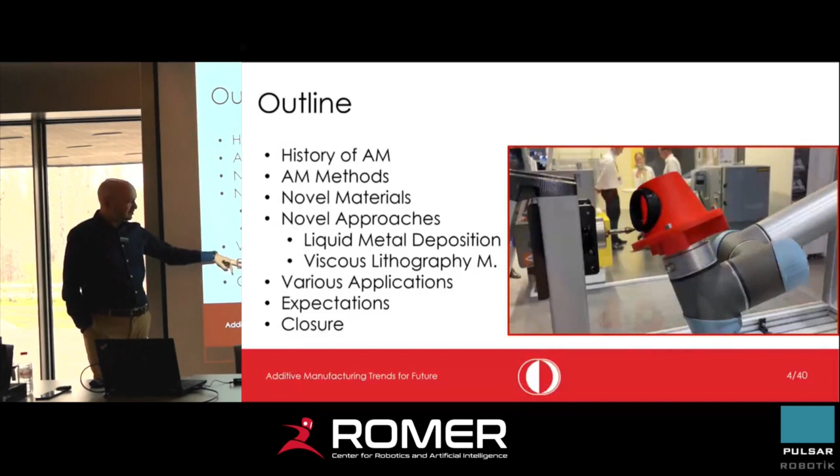Then I will show you various interesting applications of additive manufacturing, since additive manufacturing is not just a manufacturing method; you also need to change how you design the products. If you cannot design the parts properly, you will not be able to take advantage of additive manufacturing. So I will show you some interesting examples, then talk about what we are expecting in the near future, again show you some pictures and videos, and lastly I will conclude my presentation.

And this is the video I recently took in November. So you see they are using robots again, and robotic additive manufacturing is another field. Maybe that is highly related to, obviously, ROMER, this center. And you can see we have a little extruder here, and the robot is just responsible for the rest of the motion. And the extruder, as you see, is not moving. It's just stationary. And at the back side, we have a feeder. It's just feeding material, but the rest is done with this robot.

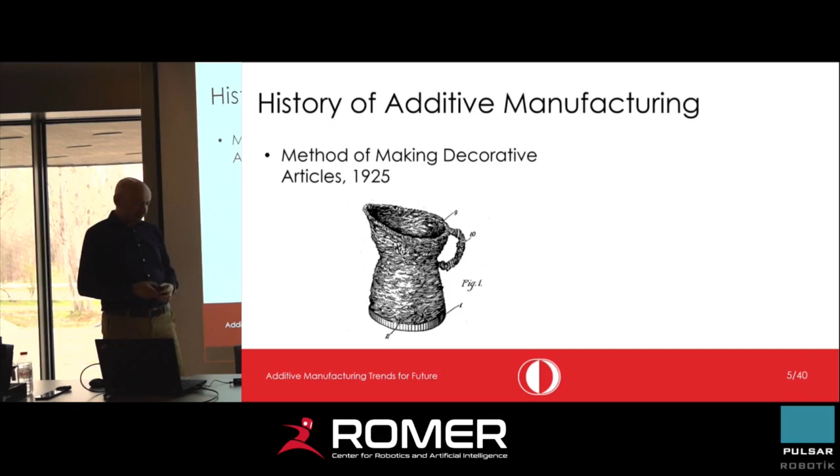So how did things actually start? This is a very old patent, as you see. It was filed around 1925 by, as far as I remember, Ralph Baker. And he thought that he could make use of the welding process to manufacture some products. This was his idea. So you see the title is Method of Making Decorative Articles. So this was a very old idea, but recently we are using robots again to manufacture some complicated products with welding. So it was actually the start of maybe some additive manufacturing methods.

But recently, maybe a month ago, I realized that things actually go back maybe 4,000 or 5,000 years. People were doing some kind of additive manufacturing, but obviously they didn't know that it was additive manufacturing. In order to manufacture jars and cup-like shapes, they were preparing coils and putting them on top of each other. So they were adding material on top of each other. And then later, by doing some rotation, they did some forming on it to manufacture the final jar.

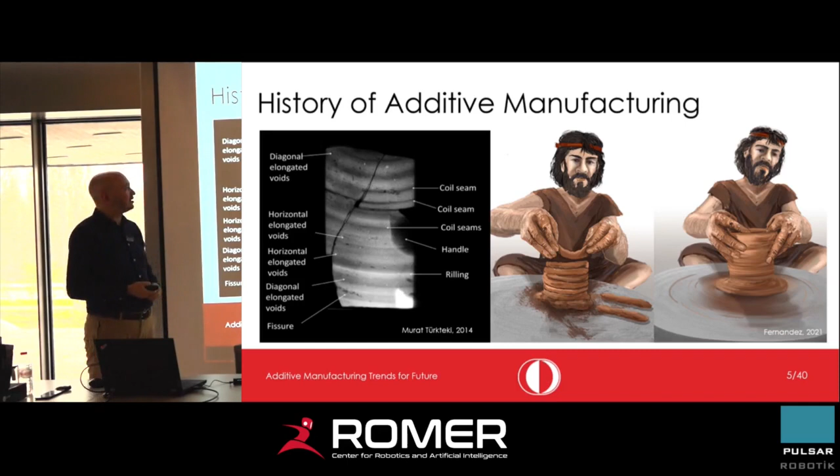And then, about 10 years ago, Murat Türkteki found some artifacts around Eskişehir in Küllüova, and they did some X-ray analysis, and you can see the layers. The same coils these people were making about 5,000 years ago. You can see the coils, the layers, and obviously they're not perfect, but they don't need to be perfect since they were used for storing things. So as I mentioned briefly, although things started in the 19th or 20th century, in reality it started about 5,000 years ago.

If you standardize these methods, there are several additive manufacturing methods, but now ISO and ASTM have agreed that there are 7 basic types. So if you come up with a novel additive manufacturing technology, it will probably fit into one of these. Whether it is an extrusion method, whether you are using a resin material and then polymerizing it, or whether you are jetting the main material. I will talk about these, by the way, and show you some pictures. In some of them, we make use of powders, and in some, we jet binders instead of the main material. In the last two, we mostly use laser or arc energy sources to melt materials and manufacture complicated shapes.

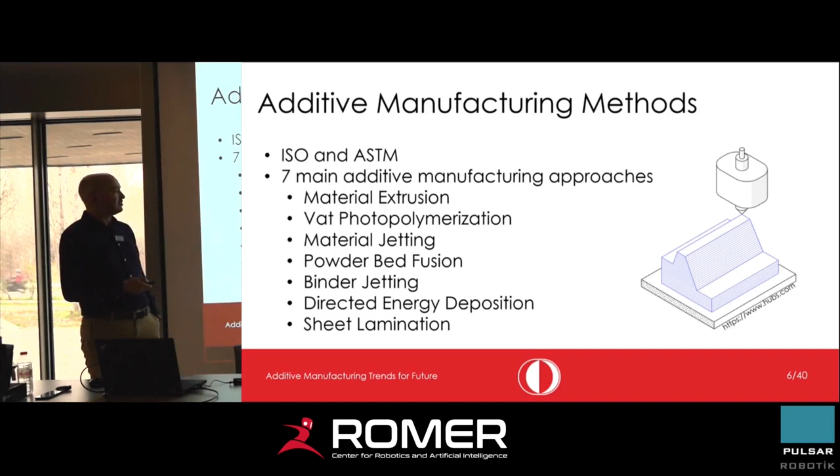And lastly, sheet lamination; we don't have much technology underneath this one. It's not that mature yet, but we will probably have more companies, more technology, more systems in the upcoming years. So, as I said, I will briefly talk about all these technologies so that everyone knows what I'm talking about.

This is the first one, and maybe most of you have experienced this material extrusion method. We make use of filaments, and then we have a feeder. This is not shown here, but filaments are fed into this extruder, and since the temperature is high at the tip of the nozzle, we extrude material. Since the head is moving on the XY axis, we can deposit material along these paths and come up with 2D layers. And if you repeat these layers many times, you will obtain such complicated shapes.

And another thing is that if you have complicated shapes, you may need to use some support structures. I have, for instance, some examples here. There's a little bunny, and as you see, it has ears which are hanging. So we need to support the ears underneath. Otherwise, while printing, since this is done layer by layer, they will fall on the ground. And in order to keep them in place, we make use of support structures as shown here.

And this is, by the way, the most common type of additive manufacturing method. It's the cheapest one, and we can make use of several materials. And another thing is that we can employ this method for various approaches. We can even use concrete to print some simple structures or buildings, or we can make use of some cells and try to come up with bioprinters, or we can even use chocolate.

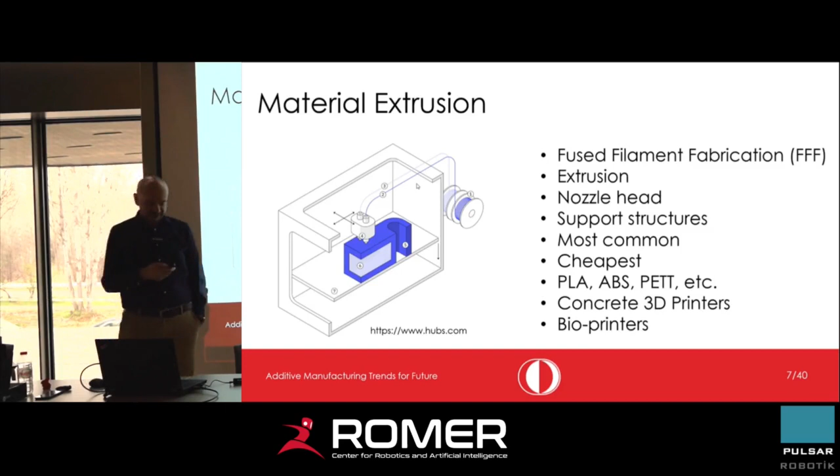And the second one, this was actually the first type of additive manufacturing invented. It is stereolithography, but we have some variations of this one. It uses photopolymers, a liquid type of material actually, and sometimes we call them resins. If you want to turn these photopolymers from liquid to solid, then you need to polymerize them.

And to polymerize them, we need to use light sources. Here we are using a laser, but it doesn't need to be a laser. You can even use some UV light or different light sources. The thing is that the energy level at this point should be higher than the critical energy level. And then photopolymerization will start, and our resin material will now be solid.

And I have another example here. This is, by the way, the same model. And you see that again, we have used lots of support structures, since the product is manufactured inside a liquid tank, but the liquid itself obviously will not be able to support these overhanging regions. So we need to have solid support structures.

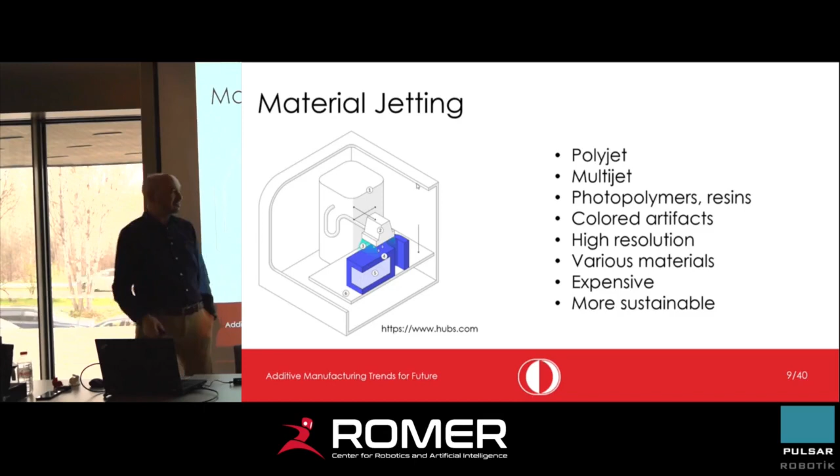Again, the rest is the same. Our head needs to move on the X and Y axes. And after one layer is completed, we need to lower our table. And again, it has high quality, like in the case of SLA. Another thing is that this is quite expensive, maybe due to the patents they have. But since they're not using a tank, they don't need to start with a high amount of material. So we can say that it's more sustainable.

Although you are printing the same design, same model, in polymers you don't need support underneath. Even if you have overhanging regions, that's not a problem. But for metals, there are several regions where we need to have support structures. First of all, it gets heavier. Another reason, the temperatures are very high. So with the help of these extra structures, we transfer heat and try to decrease the temperature difference between the layers so that the quality of the part is improved.

And in both of them, after the parts are produced, we can recycle the powders. But the thing is that the surface quality is usually not good. Another important issue with polymers: you can manufacture assemblies as they are. You don't need to manufacture them one by one. You can put the whole complete assembly into the software of your printer, and then the whole assembly will be printed as it is. After they are produced, you don't need to do the assembly.

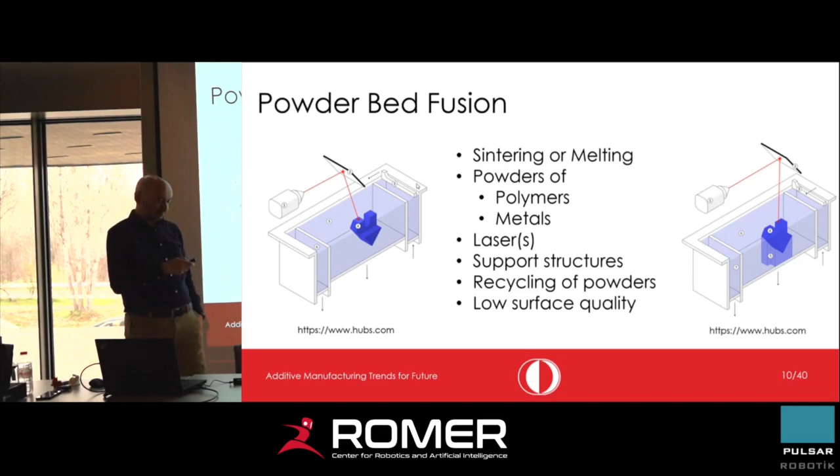But the problem is that once you take this product out of the printer, it is not strong. We call it a green part. Maybe you can even break it with your hands. So we need to perform different types of secondary operations. For metals, we prefer to do infiltration so that the gaps are filled with different metals and the strength is improved. But for ceramics or other types of things, that may not be a problem. Just sintering may be fine.

Another thing about this process is that we are not limited in materials. We can make use of plastics, metals, ceramics. For instance, in the metallurgical department, Eda Hoca is working on metals using binder jetting technology. And last week, I visited a company in Izmir, and they were using this technology to manufacture ceramics. They were depositing ceramic powders, and then with proper binders, they were joining the powders together and having ceramic parts printed.

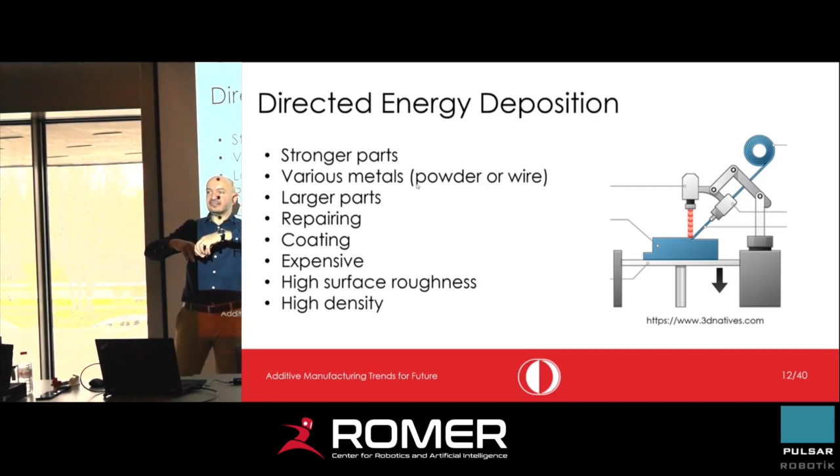Another technology is directed energy deposition, and this is especially good for metals, and we obtain quite strong products. As the name implies, we have an energy source, and we need to direct that energy source to the tip of our nozzle. At the same time, we are depositing material, and with the help of the energy source, we are melting that, mostly metal. It might be in powder form or wire form. If it's wire, we may use simple lasers, or sometimes arcs, like in the welding process. And for powders, we mostly use lasers.

Usually we need to have a protective environment around this deposition so that there will be no oxidation and no other issues with melting. If you do not have a protective environment around your melt pool, then you will probably have several defects, porosities, in the final product.

This method can further be used for repair purposes. Assume that you have a very large product, and you have a robot. Maybe at the tip of the robot, you have a laser and a powder depositing unit. You may bring your robot beside the product and fill some gaps, some cracks, so that the overall cost compared to manufacturing a new product will be reduced. Or you can use this process for coating operations. But again, it's quite expensive. We make use of lasers, and materials are specialized.

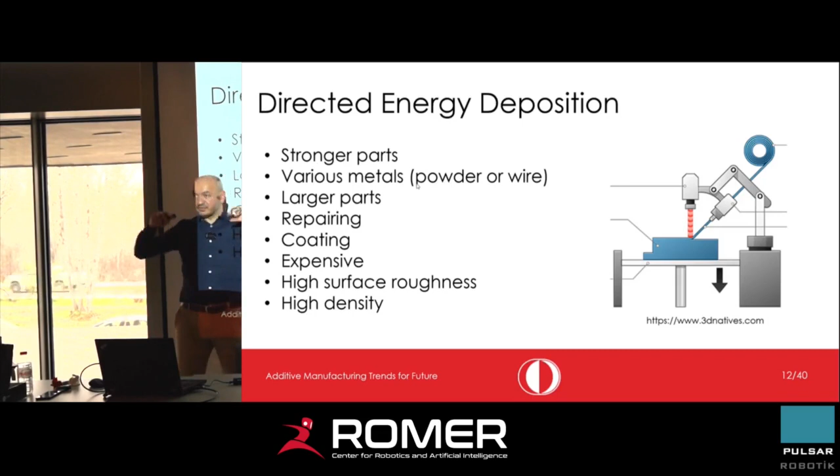Another thing, this has quite high surface roughness since controlling the melt pool is not easy. Also, we are depositing material using powder, so the quality is not good. But the advantage is that the product you're obtaining usually has high density, since you are depositing more material, and sometimes you make use of high speeds for that, so that increases the density of the products.

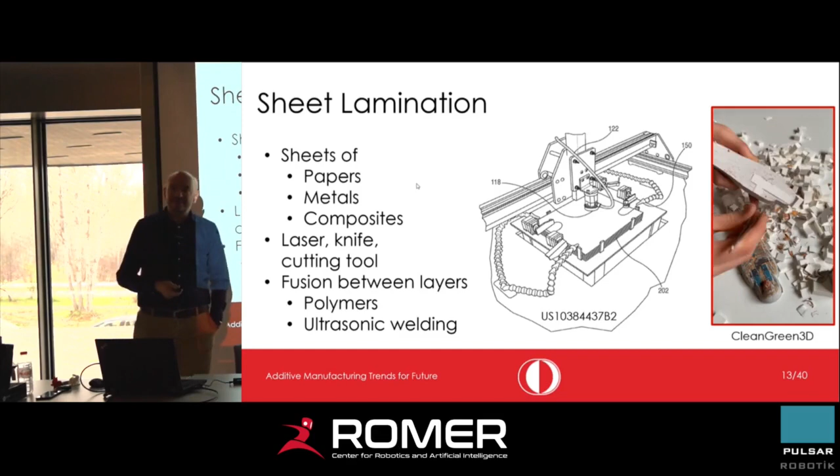And the last type of method is sheet lamination. As I said, this is the least mature type of additive manufacturing. We are still working on that, and maybe people didn't find any application areas. We can make use of sheets of paper, metals, and composites. So what we do, we put them on top of each other, and then with the help of a knife, as you see in one of the patents here, it doesn't have to be a knife, but it needs to be a kind of a cutting tool or a laser, you go over the outline of the layers and then print the products.

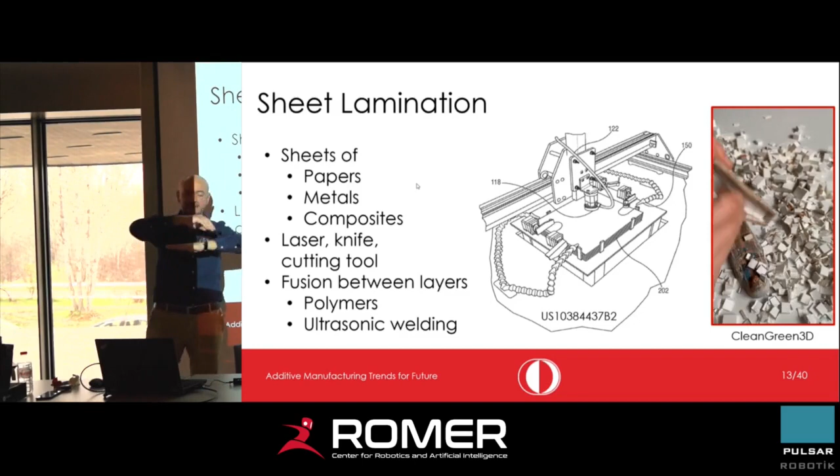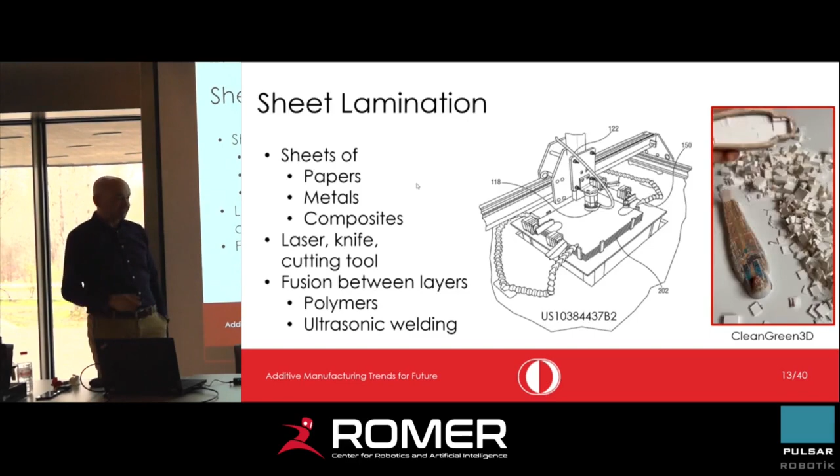And another issue in this process is that since we are putting layers on top of each other, we need to have a proper connection between the layers, and that can be obtained by making use of some adhesives, or if you are making use of metals, then you may go with ultrasonic welding. It's a totally different topic, but this is maybe one of the interesting research areas these days. So now I hope that you understand the types of additive manufacturing technologies. There are 7 of them.

And now I will talk about what kind of contributions have been made recently in terms of materials and in terms of technologies. So if we briefly talk about materials, if you consider conventional manufacturing operations, we don't have any limitation. We can machine wood, plastics, metal, so there is no limitation. But in additive manufacturing, we have low numbers of materials available for plastics, for metals, so we are limited. And that's why we cannot easily manufacture what we have in mind, or we cannot have counterparts of each artifact. That's why these days material scientists are always trying to come up with different materials for additive manufacturing.

And these materials might be in the form of powders, filaments, and resin. You have seen the technologies. Some of them were using powders, some were using filaments, wires, and some were using resin materials. So if you come up with some novel materials in one of these forms, then you can maybe use them on the available technologies.

And another interesting thing is that most of the new materials are coming with resin materials, since probably its research is more comfortable; we can put new additives inside this resin material and come up with different materials. So if you come up with new materials, then probably you can come up with novel applications. In most of the projects, we are limited by the material. But if someone invents a new material, then we may think of using that material in different areas and come up with some useful applications.

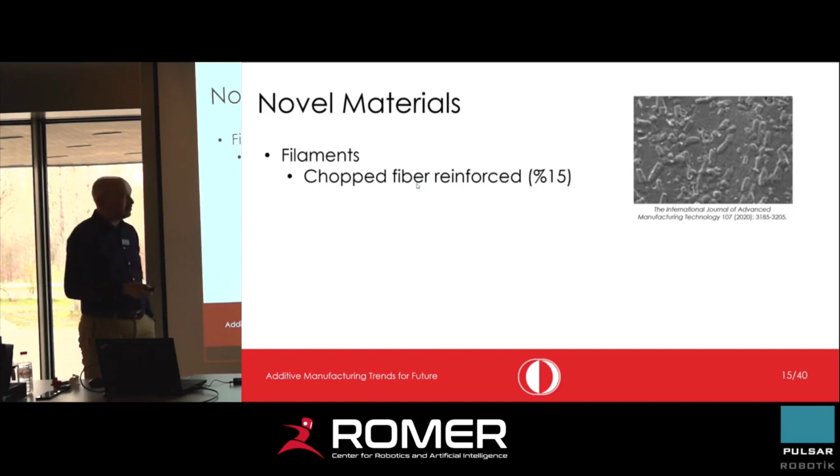Now I will show you some examples of recent contributions. For a few years, maybe about 5 years, we are these days using chopped carbon fibers. We put little fibers inside plastic filaments, and here you see an example picture. About 15% of the volume is filled with chopped carbon fibers. And the thing here is that if you increase this percentage, then probably the printers will not be able to extrude that filament. And that's why they are limited around 15%.

Another thing we are using in terms of fibers these days is continuous fibers. ROMER has recently purchased a printer which uses continuous fibers. So that is very useful. We can even obtain some products having strength values close to at least some simple metals.

And another interesting topic is that we are these days putting some metals into filaments. Filaments are obviously made of plastics, but in order to increase their strength, what we do, this is a cross section of a filament. You can see that metal powders are embedded inside this filament. And even though it has metal inside, we can use the same machine, the same printer again, and print some metal products.

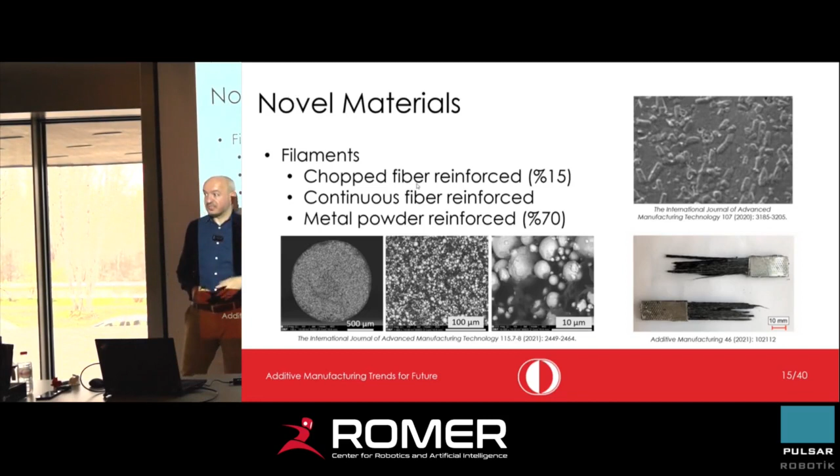But the thing is that your printed metal part will have some plastics. As you see, about 70% of the part contains metal powders, but 30% is made of plastics. So after you make use of these filaments, you need to do a debinding operation so that you remove the plastics, and then you do a sintering operation. You kind of melt the product so that these powders are fused together and you have a proper connection between the powders. So it is doable, but not easy.

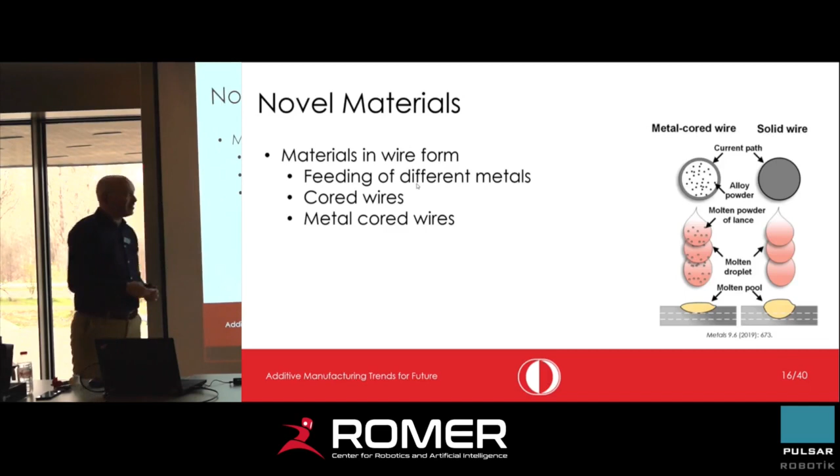We have also some recent improvements in terms of wires, and we can try to use different materials at the same time. Or we can have some cored wires, or even we can put metals inside but plastics outside. So these are some combinations of approaches.

But the thing is that obviously your extruder, your system, should be able to extrude these novel materials. And we don't have any commercial applications of this approach. Probably they haven't optimized some of the settings, or they haven't come up with a proper 3D printer which can handle these difficult materials.

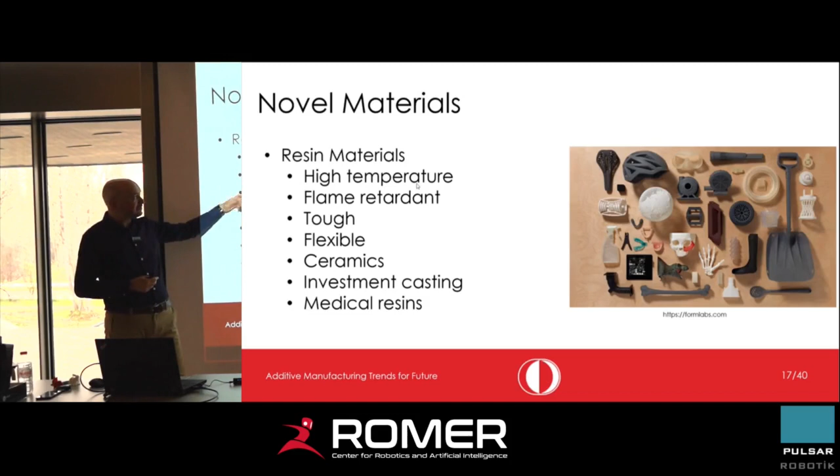And in terms of resin, there are many companies working on different types of materials. As I said at the beginning, it's much easier to come up with novel materials here, since into resin you may put some ceramic powders, or you may change the chemistry and try to make it flexible, or make it tough, or make it flame retardant. So there are different types of resins we can easily obtain.

And in terms of polymer powders, I have a nice example here. Recently, several companies gathered together and worked on a project. The idea was to manufacture a basketball without using any air inside. That's why they call it an airless basketball. And you can see how they have manufactured it. It has the same dimensions and same weight as the conventional basketball, and they used flexible material.

I have, for instance, a flexible material here. You see, it acts like a ball. And they have done a great job, but printing is not enough, since you need to clean all the powders remaining inside, and then later you need to apply some surface treatment so that it feels like a basketball.

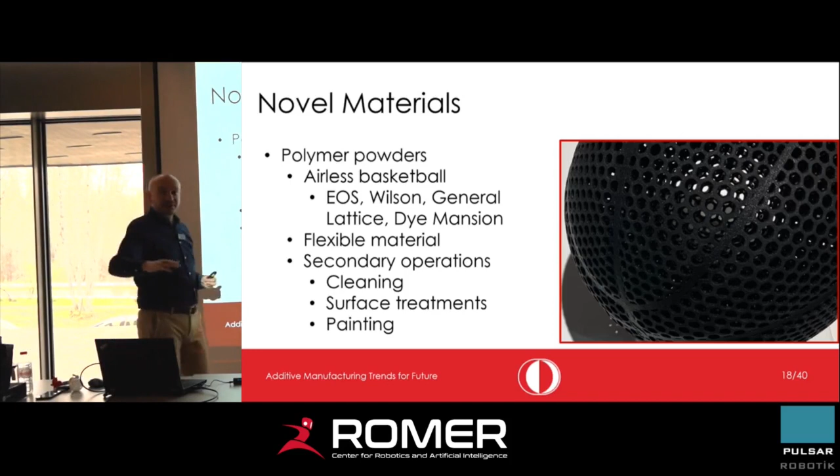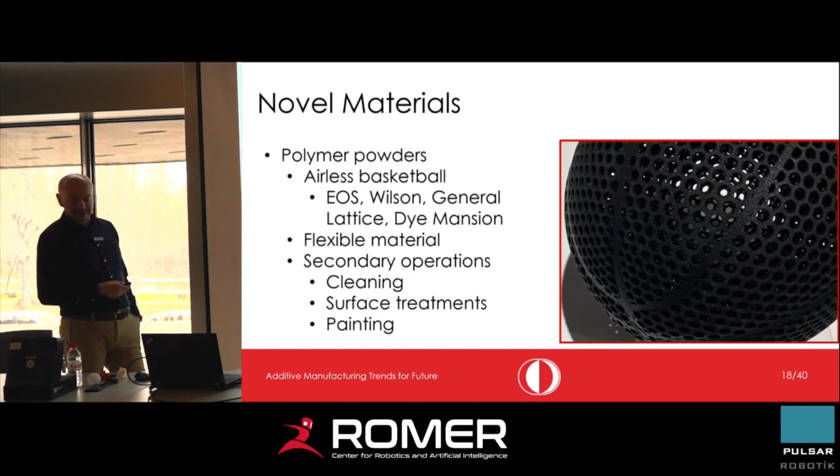If you feel it, this is made of plastics, but I don't feel that it is plastic. It's a basketball. They have done several secondary operations and tried to come up with the real feeling of a basketball. And later, they simply did some painting. And a few months ago, Wilson started to sell this one.

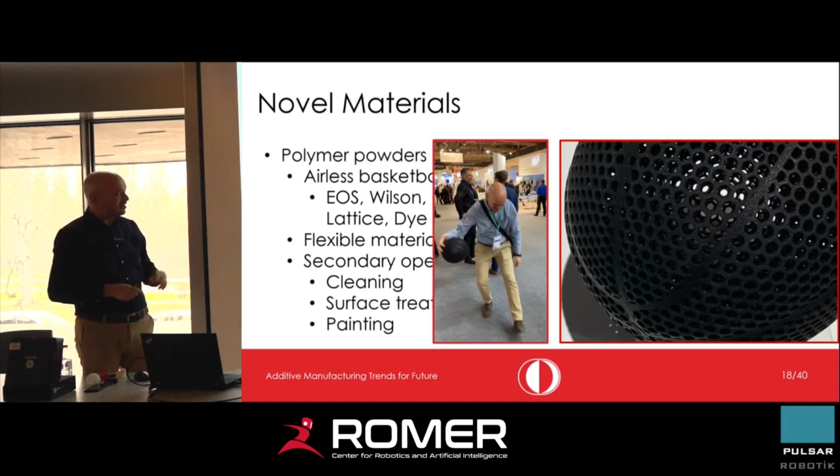And can you guess the price of this basketball made by 3D printers? 2,500. Yes, probably you have seen that. But it was really like a basketball. I actually had a chance to play with this one in November. I also did some shooting, but I haven't recorded that. In my first try it was short, but later when I got accustomed to it, it was actually a basket.

So in my first try it came up short, but in my second try I somehow did it. Professional basketball players will probably not play with this one, since if they get accustomed to it, they will play poorly in the game. I think they have used this one in one of the dunk championships in the NBA, since while dunking you just grab it, that's enough. But for shooting, the dynamics are completely different. So probably they need to work a lot and maybe come up with some different ideas.

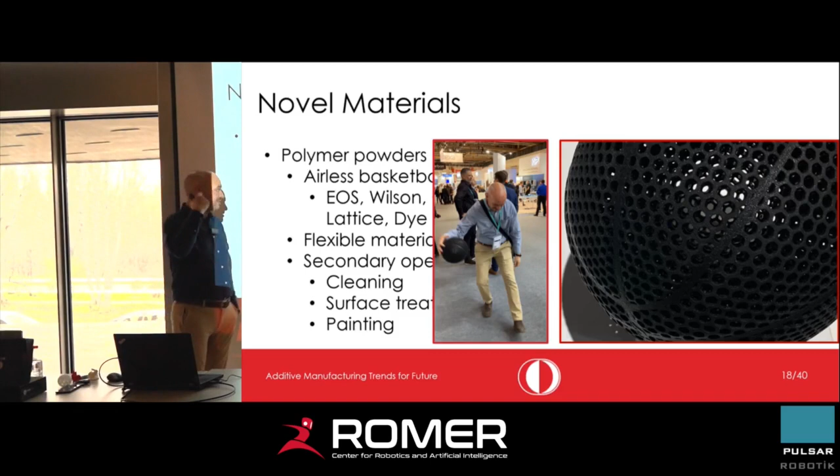And the thing about this ball is that after Wilson launched it, everyone started to print their own basketballs. In different companies, at home, people started to come up with different balls. They haven't tried football, since it's probably not durable, but as far as I remember they also tried baseball and American football.

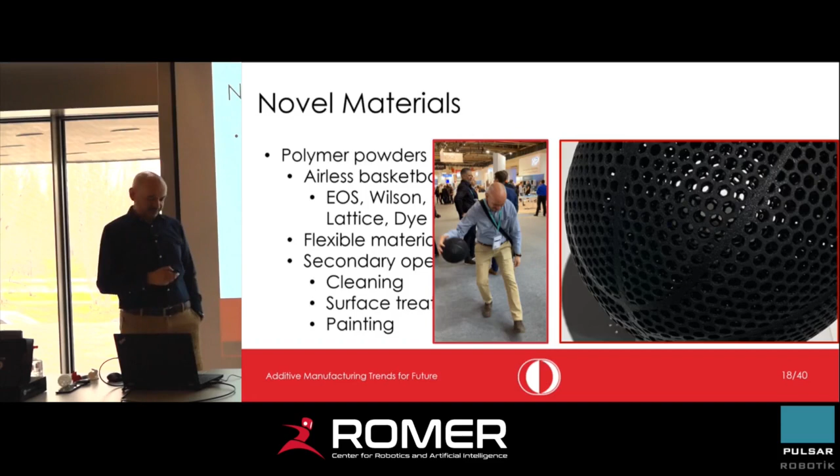I also have some other things about the materials. We were talking about powders. The previous slide was about polymer powders, and for metal powders, these days the trend is to use different metal powders at the same time. In order to do that, your machine should be able to deposit two different powders at the same time. If you remember the sketch of powder bed fusion, we have a kind of spreader, but if you have two different powders, then how is it possible?

But here the question is, do we need this? Do we need to have two materials at the same time inside a part? They have come up with a novel solution, but these days they are trying to find some applications so that they can sell their product. Right now, the only advantage is that if you use copper in some critical sections, you may dissipate heat easily there, but use steel for strength. So if you find such an application, then that might be useful. But for other issues, we can print by using a single metal powder.

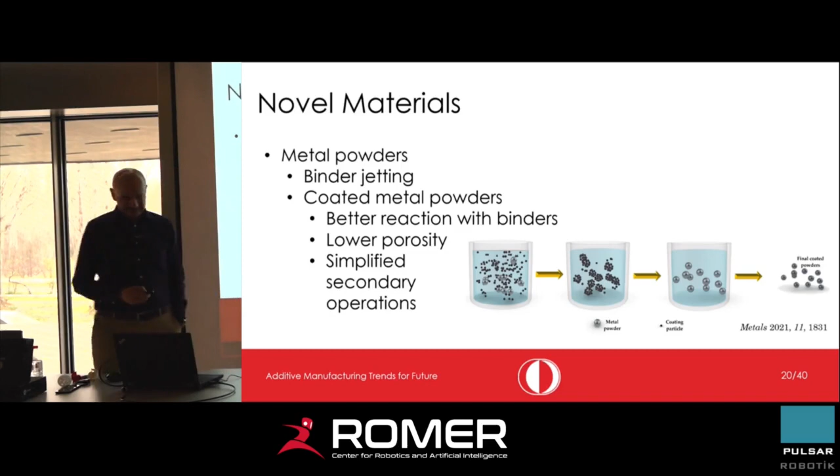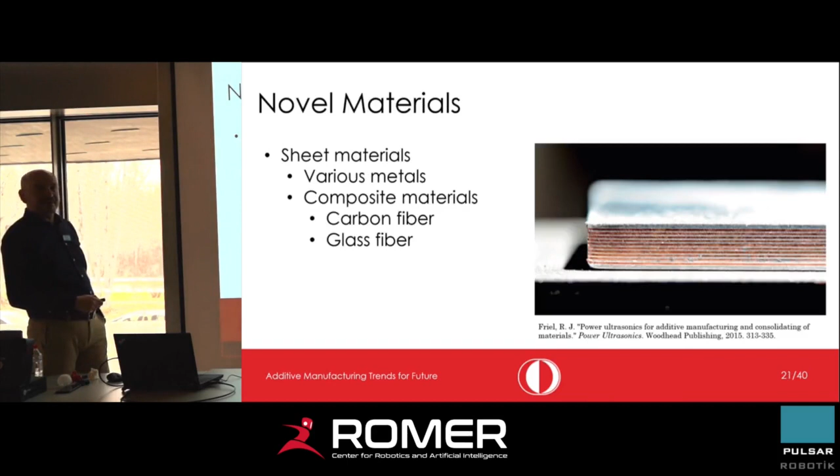So this is all I can say for the materials, but I will talk about what may be more interesting, I guess: what kind of novel approaches we are developing. In order to come up with a novel additive manufacturing technology, a new method, you also need improvements in different technologies, like improvements in projectors, laser technology, computer technology. After you have such maturity in these technologies, then you may think of developing new additive manufacturing approaches. But besides, we also have some ad hoc solutions, little solutions for the existing ones, so that their performance will be increased. And I will show you some examples of the two categories.

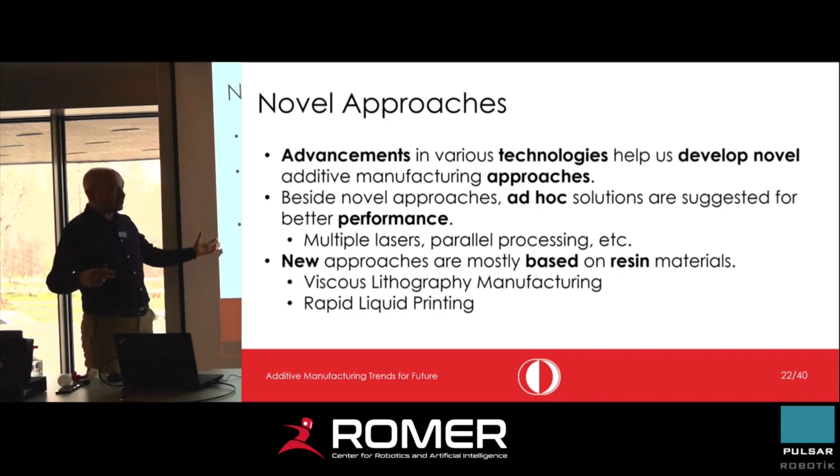And I can say that most of the novel technologies are based on resin material. They are not based on powders or filaments, but mostly on resin material, since it's much easier to process, you don't need to apply high energy. It's in liquid state. So that's why novel methods usually come up over resin material.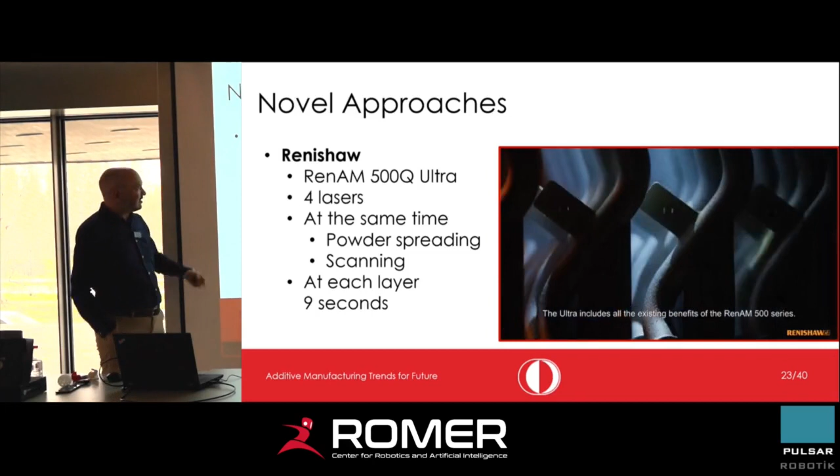Let's start from this one. By the way, this is not a new technology, but an ad hoc type of solution for metal 3D printing systems. I'm not sure whether you have realized what is going on here, but in the conventional approach, what we do is spread powder. Once spreading is done, the laser goes over the table and melts the powders. But what they are doing here is that while spreading powders, the laser is working at the same time. You can see that in a moment. So you see the laser is working, and also it's working at the back side.

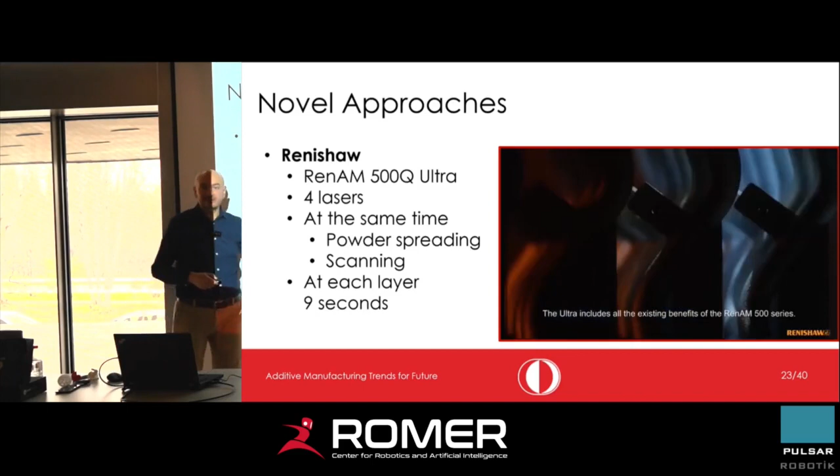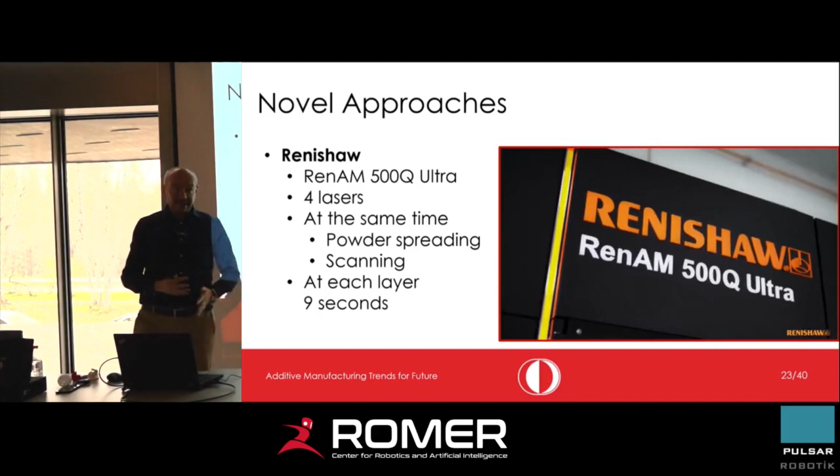Conventionally right now, almost all metal 3D printers wait for the spreading operation. After spreading is finished, they start melting the powders. But they are doing something different so that they gain 9 seconds per layer. So if you are producing a very long product, this makes a lot of difference. And if you think of additive manufacturing being used in critical applications in the upcoming years, then that will be quite important.

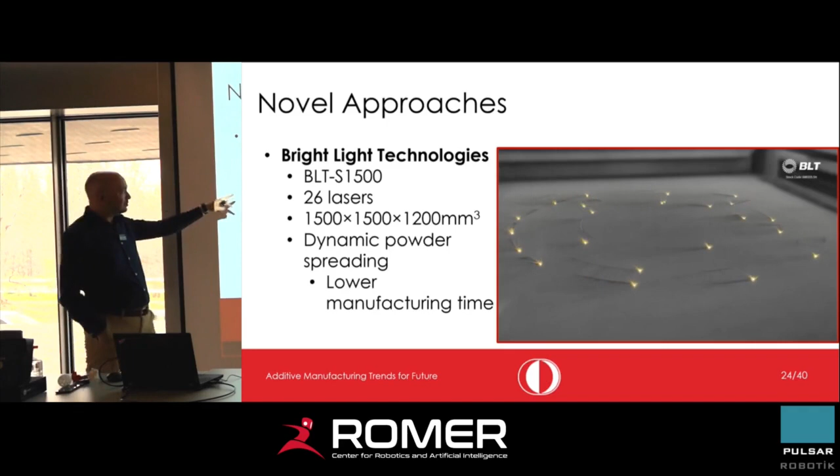And this is another ad hoc type of solution, but this is quite straightforward. What they do is that instead of using a single laser, to decrease fabrication time they use, as you see, a maximum of 26 lasers at the same time. So manufacturing time is decreased a lot.

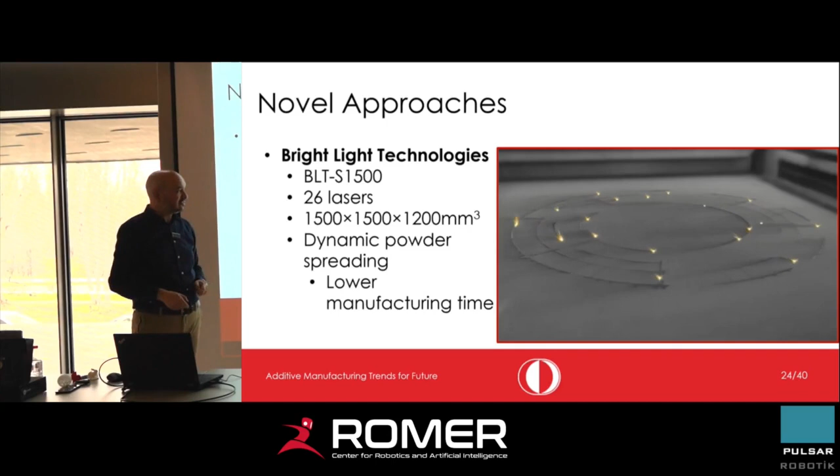But the difficulty is that you need to divide your actual slice into proper regions, and you shouldn't have any collisions, and you shouldn't have too much difference between the regions of two lasers. You need to have smooth transitions between the regions. But obviously, that saves lots of time.

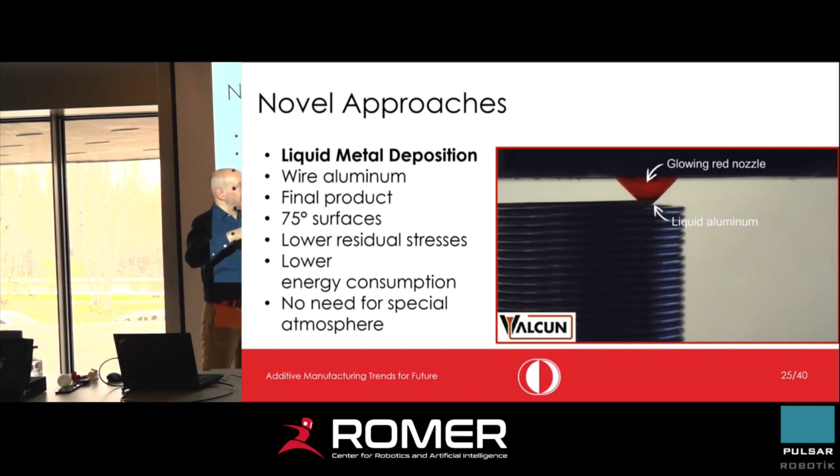And the rest is actually not complicated. It's like material extrusion. We have the nozzle, they are increasing the temperature, melting aluminum, and then depositing it. And since it solidifies quickly, even for a surface having a 75-degree angle, they can manufacture it without using

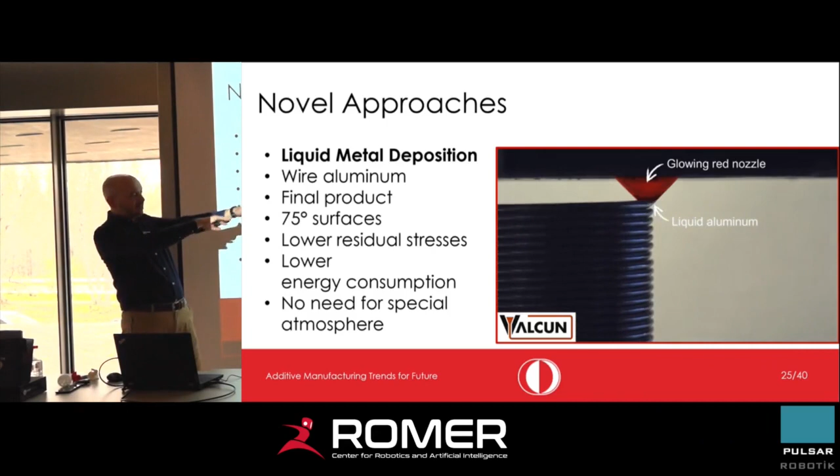any support structures. Another thing, since the temperature difference is not much, again, we have less residual stresses, so the quality is maintained and the dimensions are quite good.

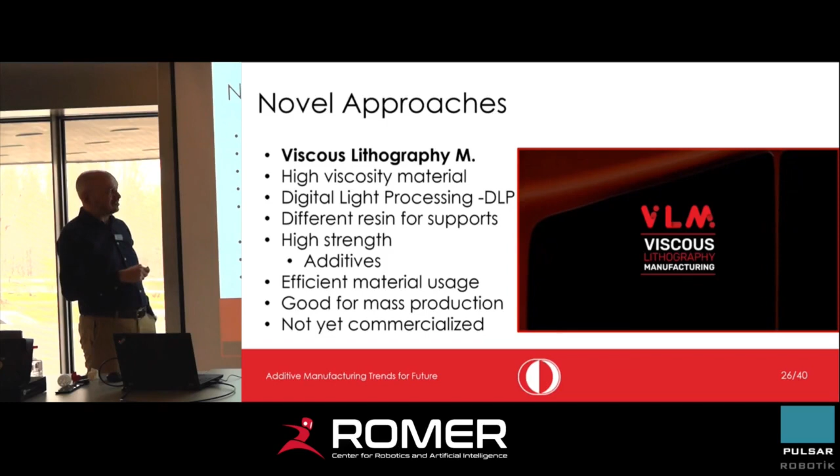And this is another novel technology, and you can see that it is based on resins. But the difference is that they are using highly viscous material. It's quite a special material, and you can see how difficult it is for it to move, but still it's a resin material. And here they actually combine several technologies to come up with a novel technology.

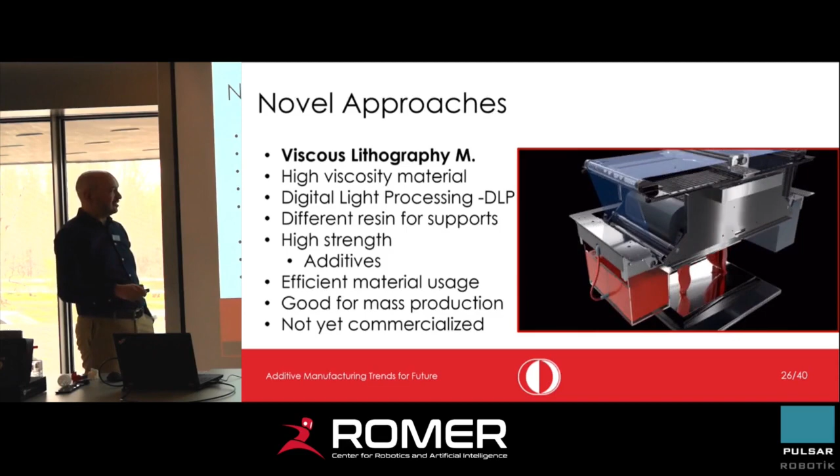You can see that they are using a projector for curing, and these structures are like an extruding process. And another thing, they can use two different materials, one tank for support structure, one tank for main material. And now you see that in a moment, this will take some material and put it onto the film. So it becomes like a sheet lamination.

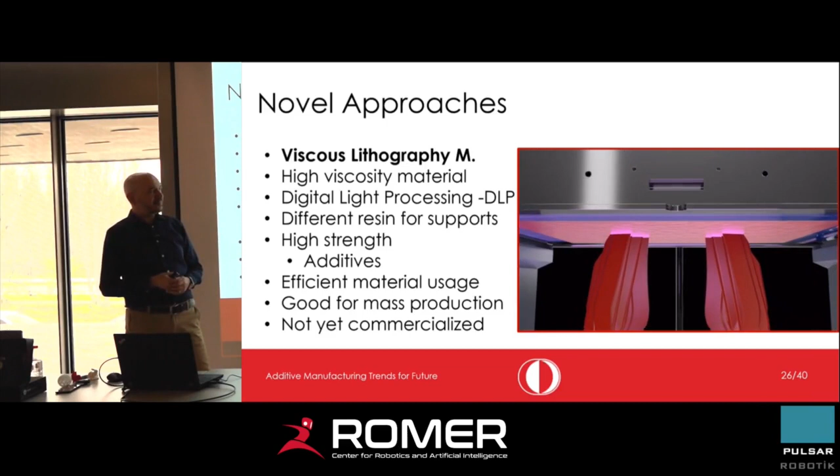But I cannot say that this is purely sheet lamination. It uses some steps of sheet lamination and some steps of stereolithography. And they claim that, with the help of some extra chemicals inside the resin, they manufacture stronger products.

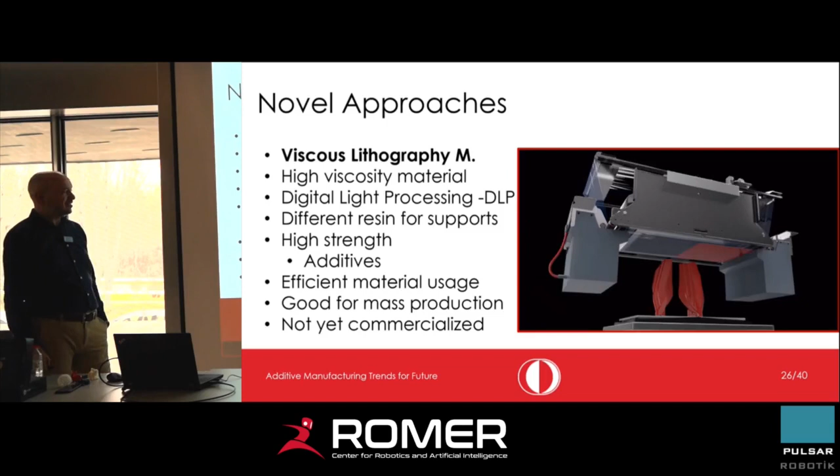Another thing, since they're not using a tank and they recycle unused portions of this film, this is quite sustainable. But the thing is that it's not yet commercialized. Maybe intentionally they're not commercializing it. They're trying to get manufacturing orders from customers and manufacture the parts themselves. But I think maybe in a few years they will start selling their machines.

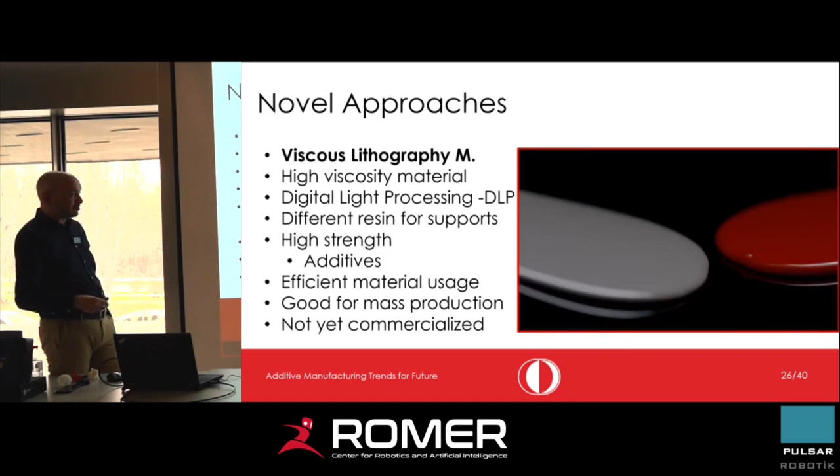And in summary, I can say that this is good for mass production, especially for larger plastics. And you can see their viscosity and two different materials, but they are not mixing.

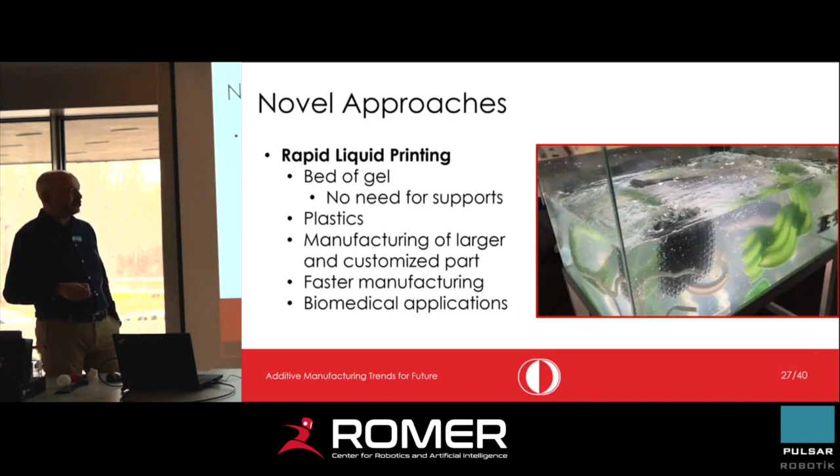What is here is not shown, but they have like an injector. They put the injector inside and then it goes over the bed and deposits plastics. And it doesn't need any support structure. But the thing is that we cannot easily use the outputs of this process. Instead of this process, I can use cheaper material extrusion or stereolithography. Why should I use this one?

So that's why they couldn't commercialize the system yet, but they are trying to find some biomedical applications, maybe flexible, maybe in soft robotics, they can print some simpler shapes which can extend themselves under pressure. So after that point, maybe they will commercialize it.

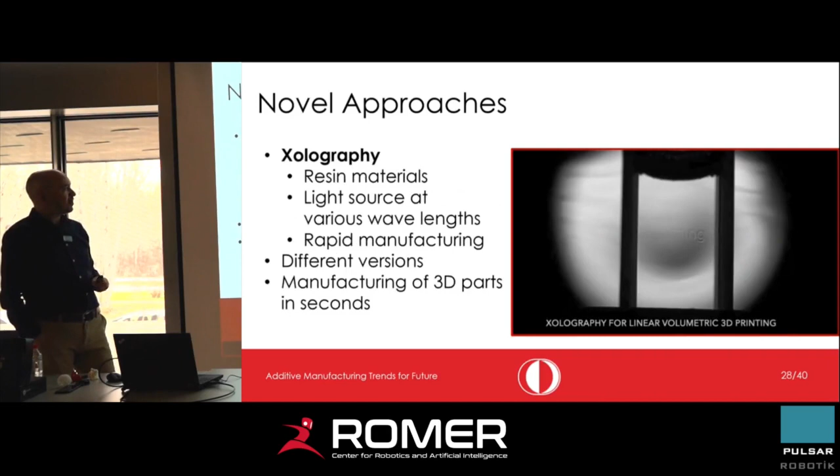Another novel approach, and this is quite different than the previous ones, but still this one is also using resin material. And the idea here is that, for instance, in material extrusion, we extrude some material and go over a specific path. And this is point-based manufacturing.

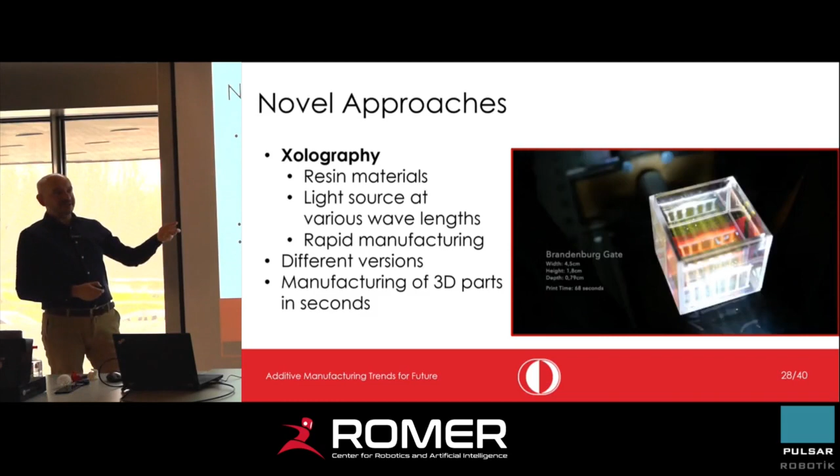And if you think about material jetting, on the head we have several nozzles. And if you move your nozzle like this, then you will be doing one-dimensional printing.

And if you make use of projectors, if you reflect your image and cure the whole layer at a time, then that will be 2D manufacturing, 2D type of curing. But here, they are trying to actually cure the products in a different way, actually by using not completely 3D, but 2D time, maybe plus and linear movements.

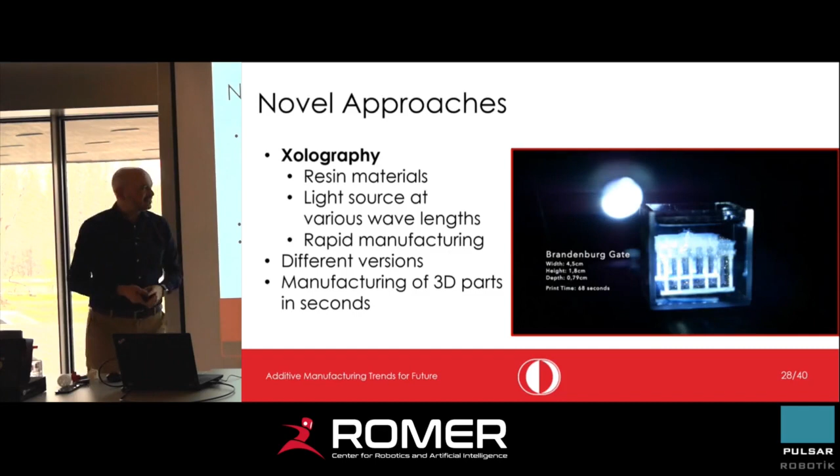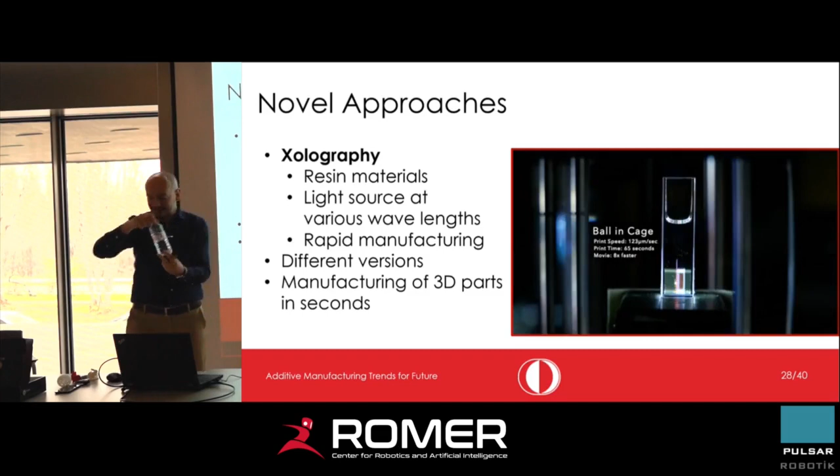But my idea is actually, my dream is to actually manufacture a product in some seconds by using several projectors. So you will have a kind of resin inside this one, let's say, and then you will reflect light from both sides, and in few seconds, your material inside resin will be cured. It's like actually holography. That's why actually they call it Xolography.

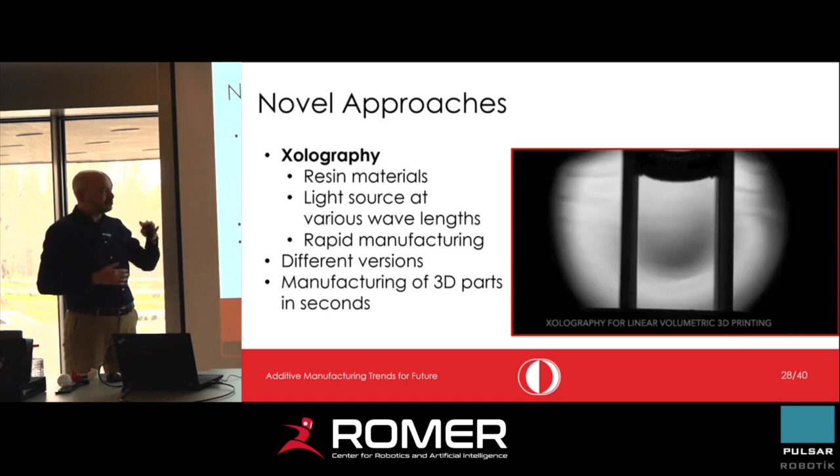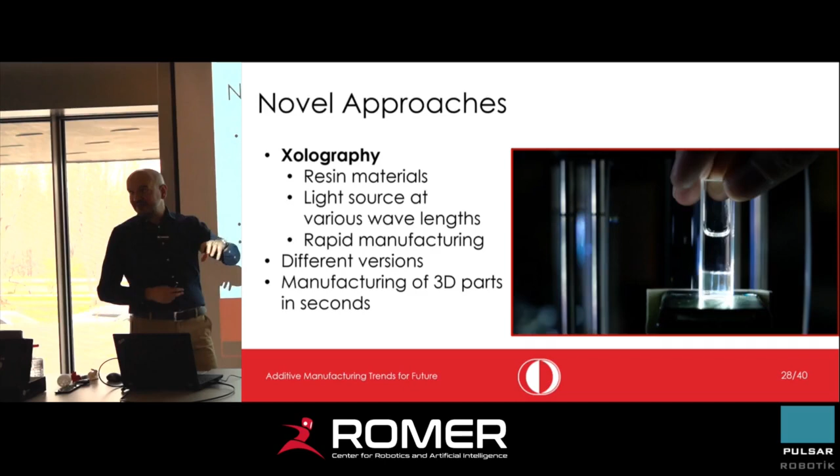I think in near future you will see such an example, since as far as I know, there are several universities working on that. They should actually come up with a proper resin material. Since if you are reflecting light from different sides, then your material should be able to cure itself under these conditions. And the advantage is that, as you see here, it takes about 65 seconds. But in my idea, if you have the proper material, if you have the proper equipment, hardware, then maybe in few seconds, you will be able to manufacture the complete product.

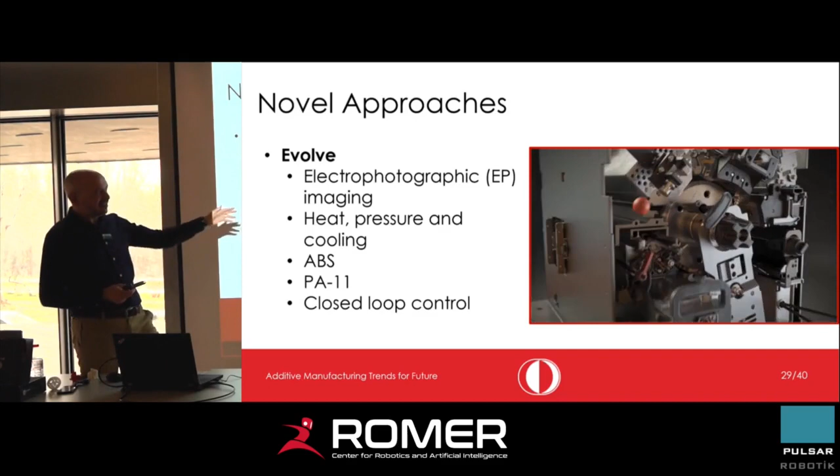Another technology, recent technologies actually Evolve. So even though they have put some video on their website, it's not clear yet how their method is working. And another thing is that they are again not selling the machine. They are getting orders from the customers and manufacturing the products for the customers. You can see, for instance, an example here. It is made of ABS material. They can only use few materials right now.

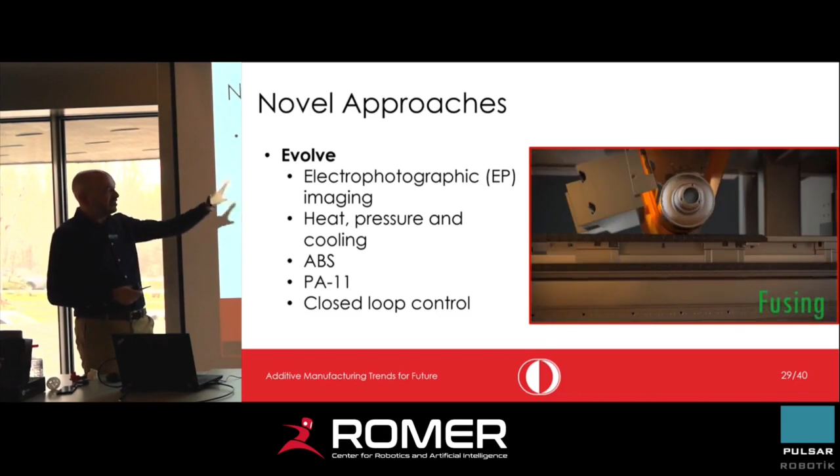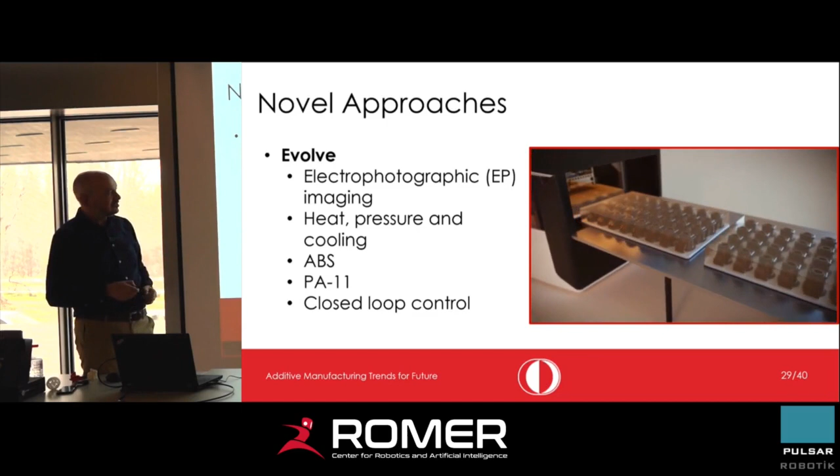They use again some light technology, some resin technology inside, but even though they are trying to describe these methods in this video, it is not clear. They have some patent issues, and that's why they're not giving much information. They are not selling their machine. And obviously they have closed loop control systems at every part, so that they obtain high quality products at high numbers. So that technology is quite useful for mass production.

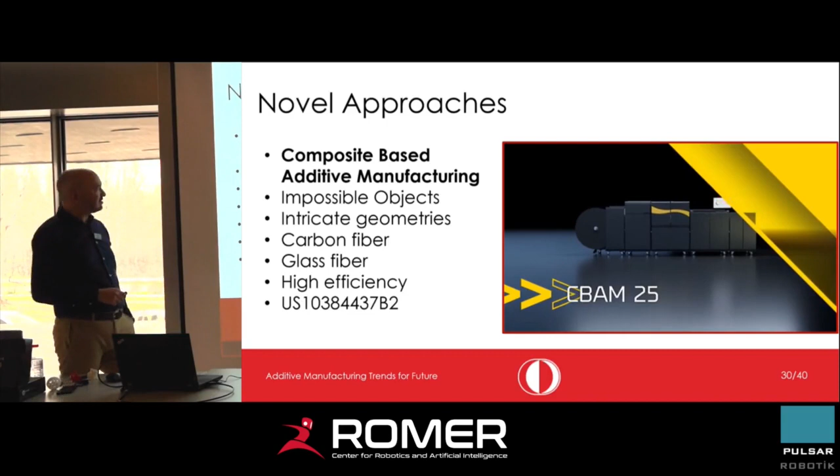Another novel technology is the composite-based additive manufacturing. They have got some investments from different companies, so probably we will be seeing a lot of these in near future. And they start with some composite sheets, and then they deposit some extra chemicals on the sheets, and then cut these sheets and put them on top of each other to obtain complicated composite materials.

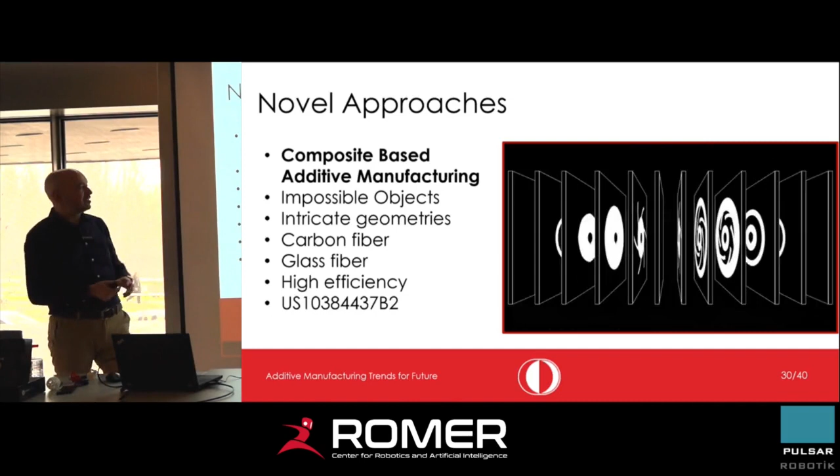Since if you are into the composite world, you know that they are mostly simple shapes. They are sheet-like materials or some simpler geometries. But here you can see that they will come up with a complicated product. Another thing, they can put not only carbon fiber, but they can also put some glass fiber inside.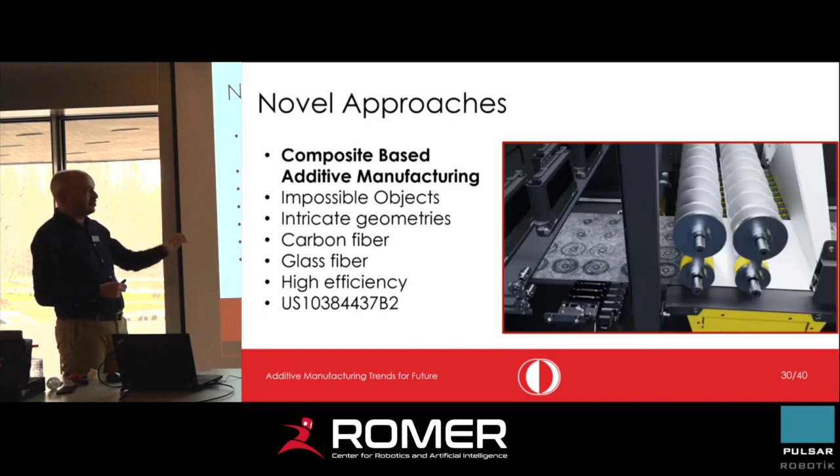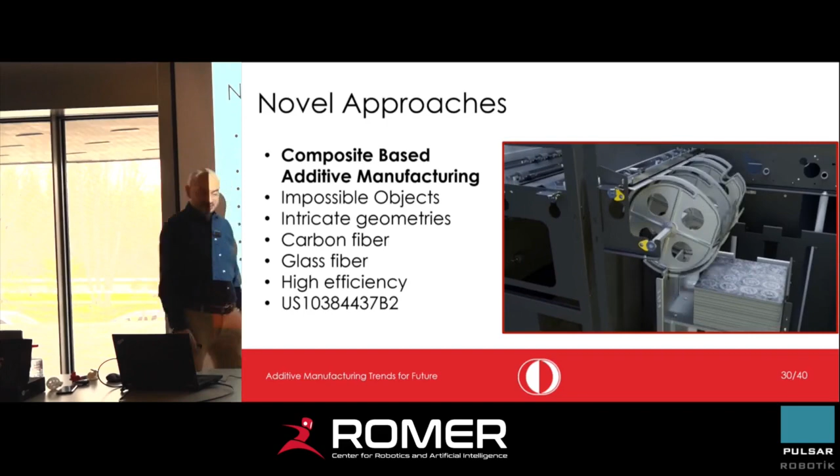So they are using some water, but depositing water selectively, not to each point, and then depositing some polymers on that so that it will stick to these points, and they will obtain the layers. And then they will do some cutting operation. They will cut the layers and put the layers on top of each other in a moment. And this is cutting operation. And they will further cut down into single layers and do some pressing.

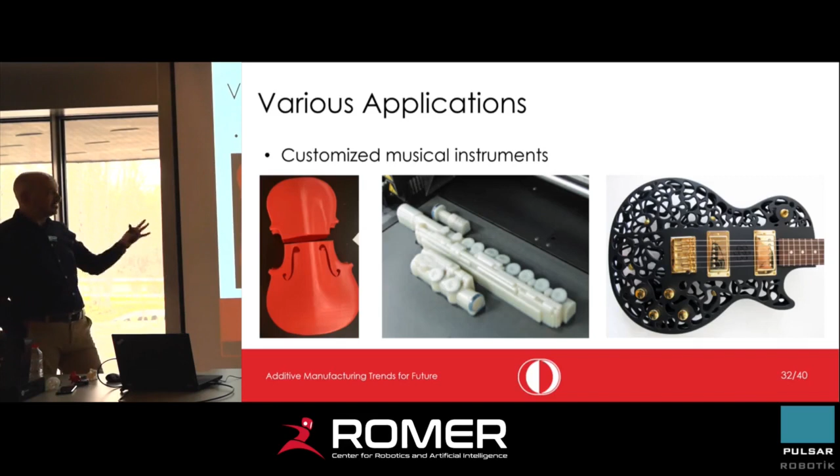So now let me show you some nice applications of these additive manufacturing technologies. First of all, these days we are trying to, as I said, always come up with some fields where we can use additive manufacturing. One of them is to manufacture such cutting tools in machining, and conventionally they are made by powder metallurgy, but instead we can make use of additive manufacturing. Or these days we can make customized musical instruments. You can change the size, you can change the pattern. So we have such freedoms, and probably we'll see more of these in near future.

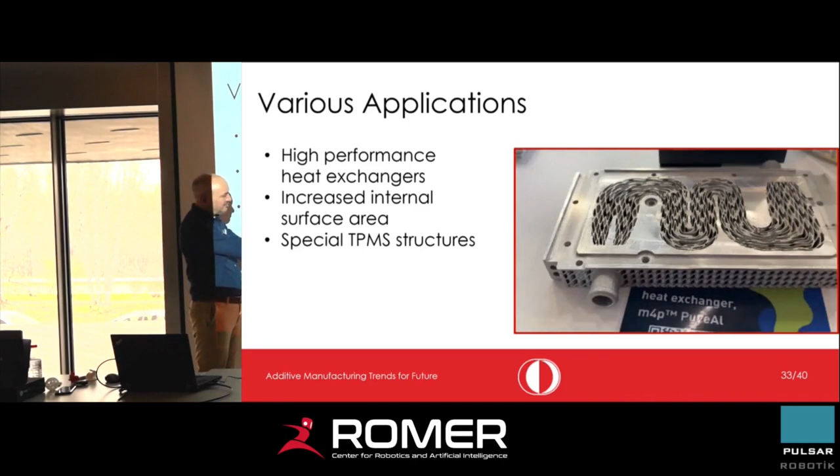Another one is actually we are using additive manufacturing these days a lot for heat exchangers. You may even have such complicated channels, little channels inside. So you see that from one side we will have hot fluid, from the other side we will have cold fluid. And with the help of additive manufacturing, we can easily increase surface area. And surface area, as you know, is highly important in heat exchangers. You want to increase it as much as possible, and that is possible with additive manufacturing.

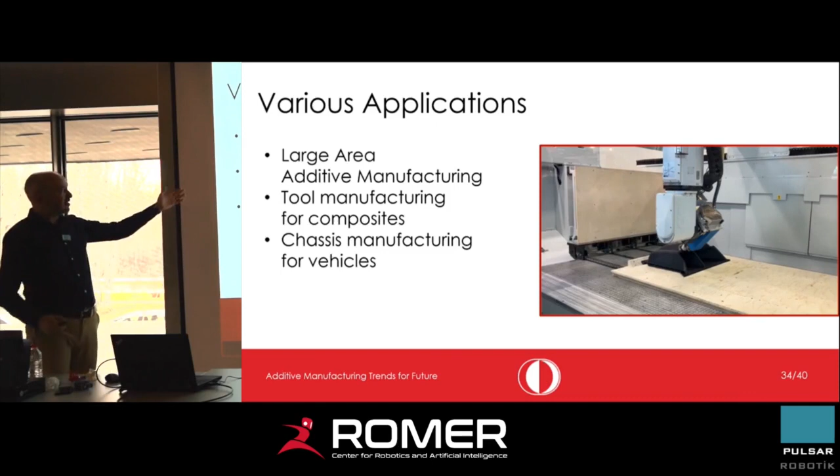Another application we will see more in the upcoming years is large area additive manufacturing. So these days we are mostly printing smaller items, but in near future we will have larger ones, maybe for preparing the tools for composite manufacturing, or maybe to manufacture some buildings or the chassis of some larger systems, even vehicles maybe. We will see more of these.

Another field where we will see additive manufacturing a lot is aerospace. For instance, Relativity Space has recently manufactured the body of a rocket out of just additive manufacturing. They used wire arc additive manufacturing, and they also have small components, but the whole body, which is quite large, has also been manufactured with wire arc additive manufacturing.

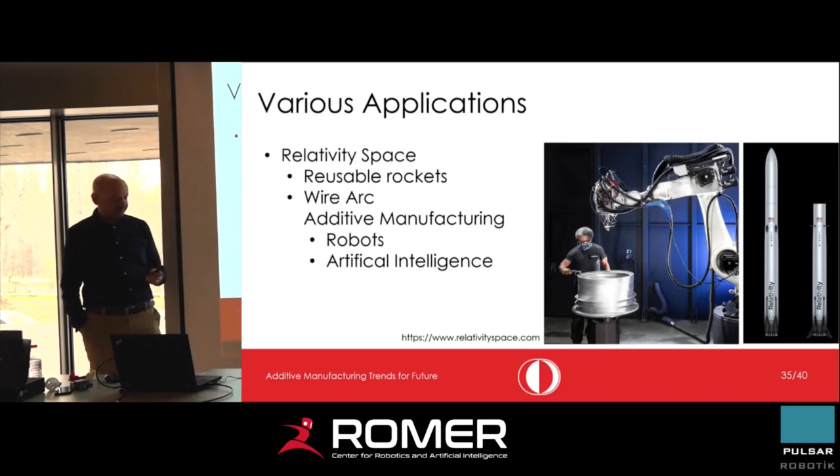And what are we expecting from additive manufacturing? First of all, right now we are using robots, but we will use more robots in additive manufacturing so that we can have complicated shapes and produce larger products. And we are trying to make additive manufacturing as sustainable as possible.

So we will try to find ways to use less material and less energy, and we will again see lots of additive manufacturing in concrete building. By extruding concrete material, we can manufacture buildings. For instance, recently in Saudi Arabia, they constructed a mosque by using concrete 3D printing.

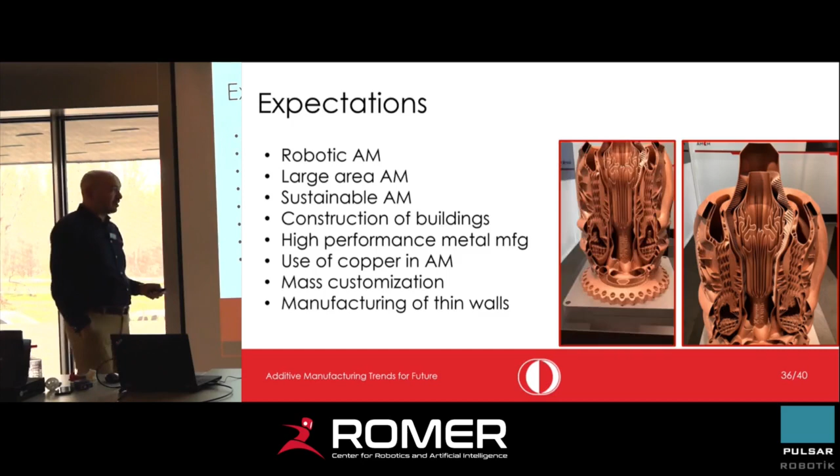And we will have high performance in metal additive manufacturing, and we will probably see the use of copper in most applications, since it was quite difficult in earlier years, but now we have some control over copper powders, and we can manufacture more parts made of copper.

Another thing we will see is mass customization. The products we purchase will always be customized according to our requirements. So I might purchase a pointer which will exactly fit into my hand. This will be possible in the upcoming years.

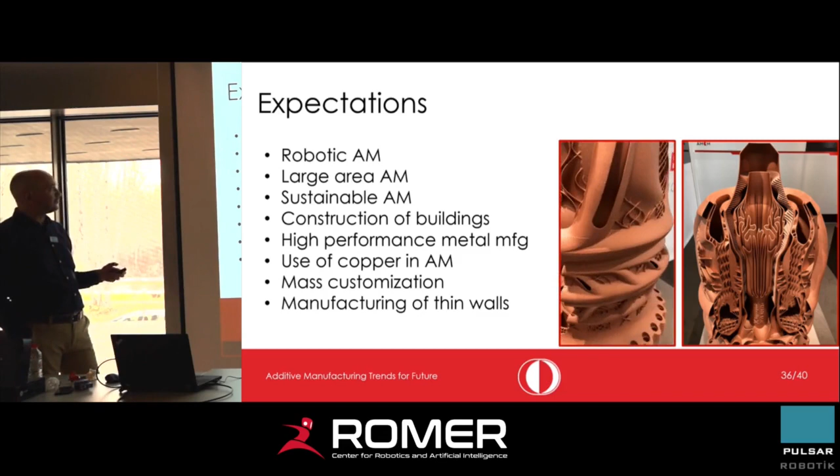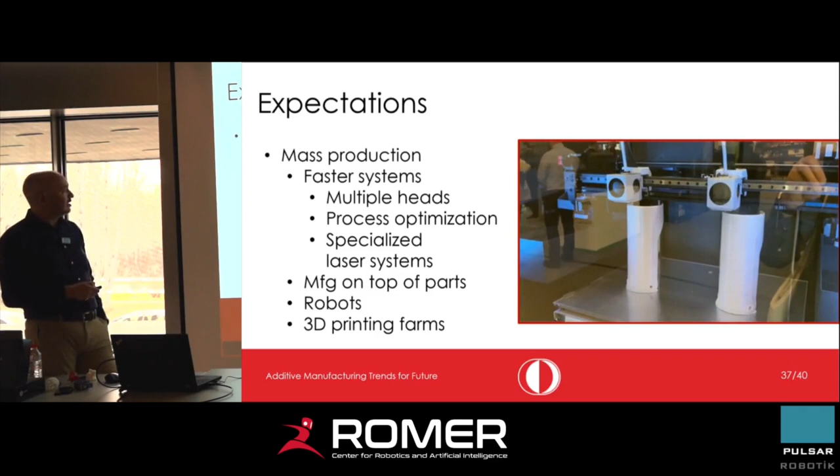And another thing we are expecting: since people are not using additive manufacturing completely for their manufacturing, they can use additive manufacturing on their conventional lines so that their overall efficiency will be improved by using additive manufacturing beside conventional systems.

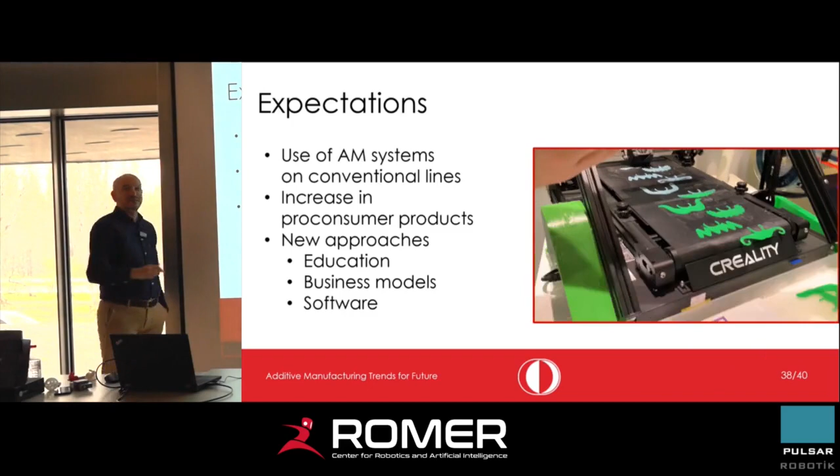Another expectation is that we will have high quality printers in the near future, and their prices will not be that high, so people can purchase high quality printers for their home and manufacture at home. Furthermore, we will see new approaches and new applications in education, in business models, and also in software, especially design analysis software, in the upcoming future.

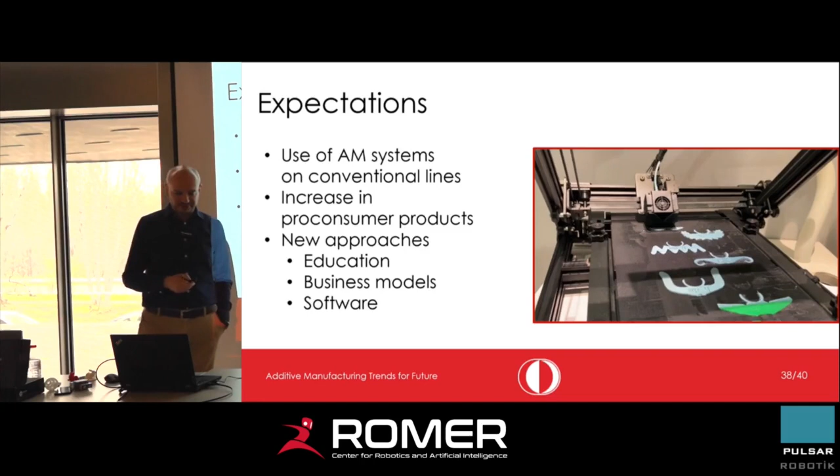So let's summarize. You have seen that there are many expectations from additive manufacturing. I hope all of them will be satisfied, and we will see more applications of different materials and different approaches. Another thing we will see is hybrid manufacturing. We cannot completely replace conventional manufacturing operations with additive manufacturing, so instead we will combine them and take advantage of both conventional systems and additive manufacturing methods.

And another thing: if at some time we are going to live on the Moon or on Mars, then we will probably have systems manufacturing buildings for us with the principles of additive manufacturing. Also, as I said, these days we have some limitations in terms of materials, but we will probably invent more materials so that parts which cannot be manufactured on conventional machines will be manufactured on additive manufacturing systems.

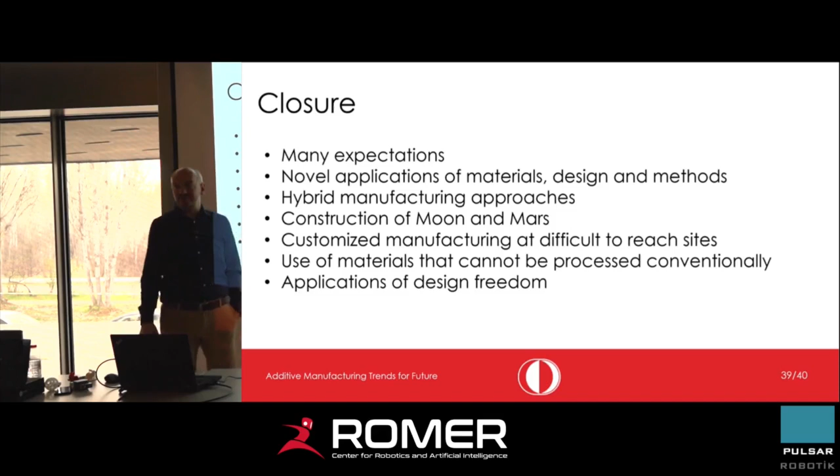A last thing I can say is that with additive manufacturing, as you know, we don't have many limitations in terms of design, so we will have more applications of this design freedom with the help of materials and applications. Well, this is all I can say for now, but if you have questions, we can discuss some topics.